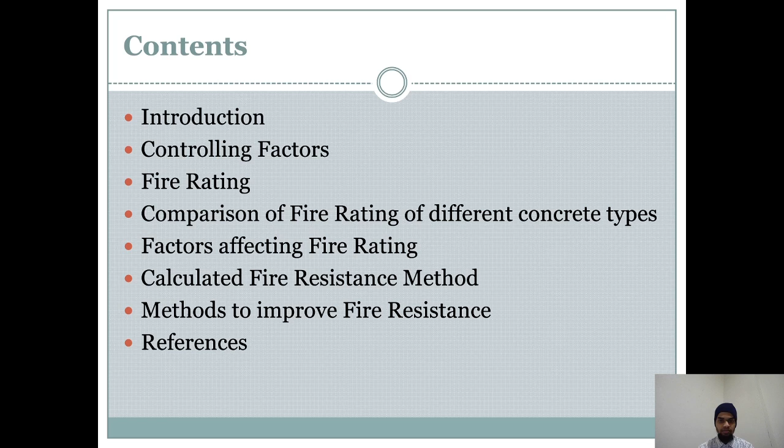In this context, we're going to look over its controlling factors, then what is fire rating, comparison of fire rating in different concrete types, factors affecting fire rating, a few calculated fire resistance methods, the methods that can improve fire resistance, and a few references as well.

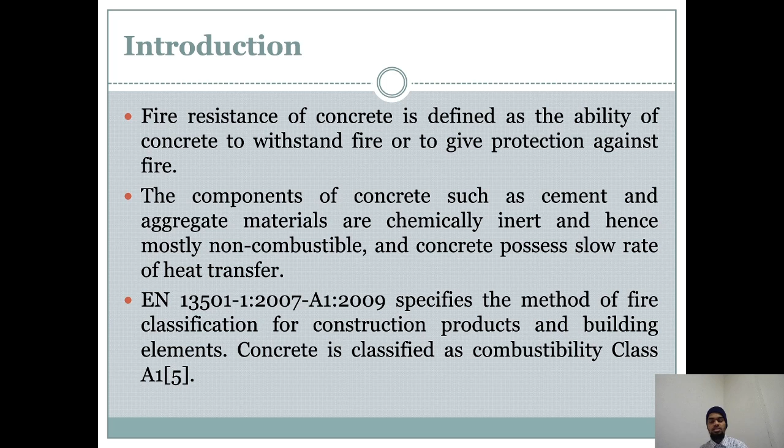So, what is fire resistance? It's the ability of concrete to withstand fire or to give protection against fire. The components of concrete, such as cement, sand, fine aggregate, coarse aggregate, are chemically inert and hence mostly non-combustible, and possess a slow rate of heat transfer. European national standards, mentioned in the slide, have specified the fire classification for construction products and building elements, in which concrete is classified as combustibility class A1.

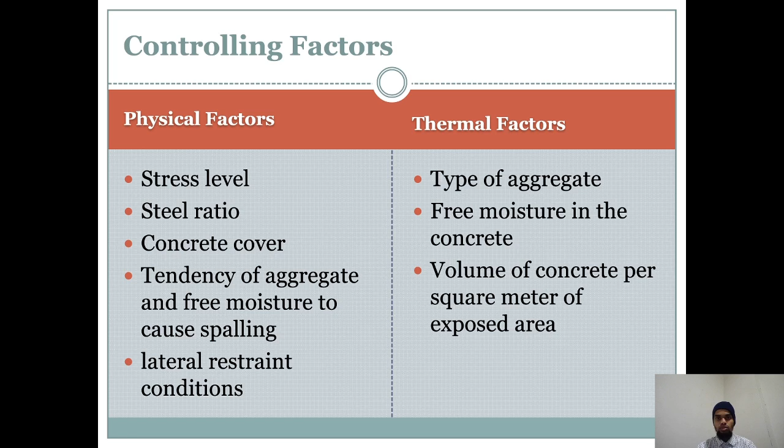There are a few factors that control fire, divided into two categories: the physical factors and the thermal factors. In physical factors, the stress level, steel ratio, concrete cover, the tendency of aggregate and free moisture to cause spalling, and the lateral restraint conditions are to be considered. Whereas in thermal factors, we must look at the type of aggregate, the free moisture in the concrete, and the volume of concrete per square meter of exposed area.

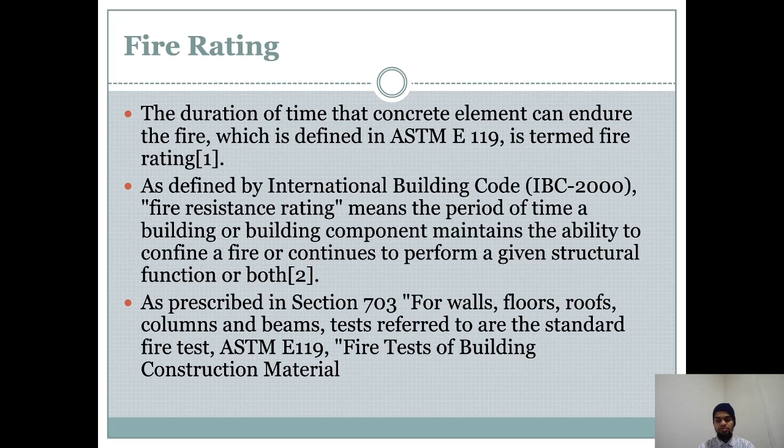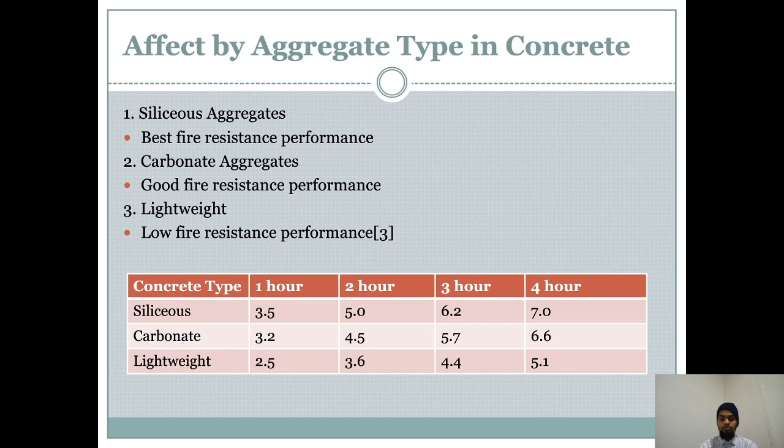When we talk about concrete and fire, we must also look at the different types of aggregates used in concrete, which have different effects. Some can be good, some can be bad. For example, siliceous aggregates are considered the best fire resistance performer, carbonate aggregates just good, and lightweight the very low fire resistance performer. The table describes the different concrete types and the hours of fire resistance. For 1 hour of siliceous material, it is like 3.5 inches. The whole table is shown here.

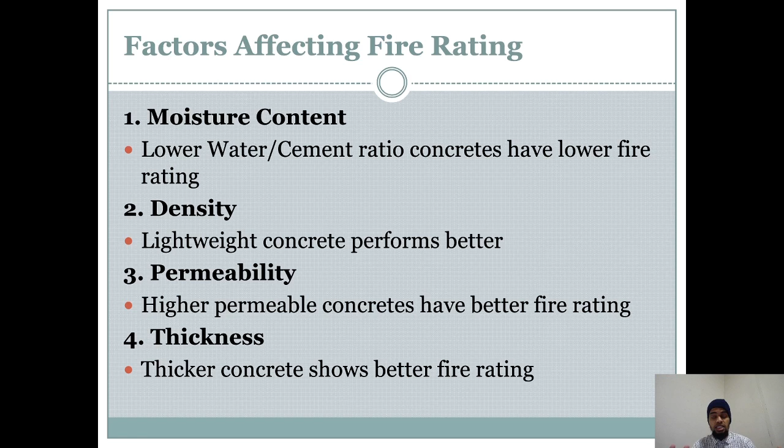Thirdly, there is permeability. Higher permeability concrete possesses better fire rating. And lastly, the thickness. The thickness of concrete also affects fire rating. The thicker the concrete, the better the fire rating.

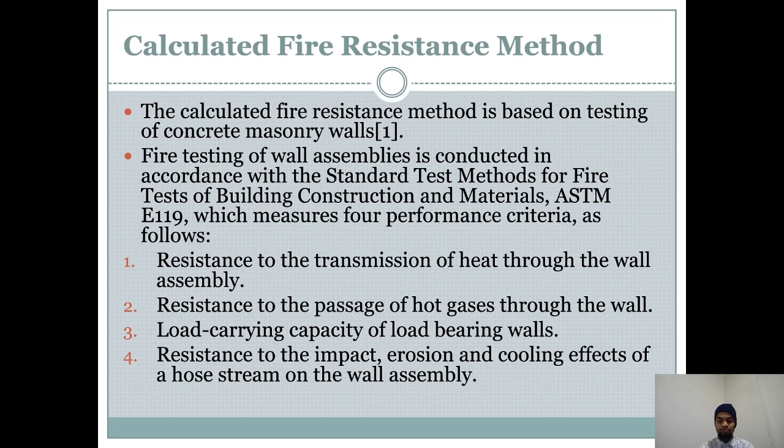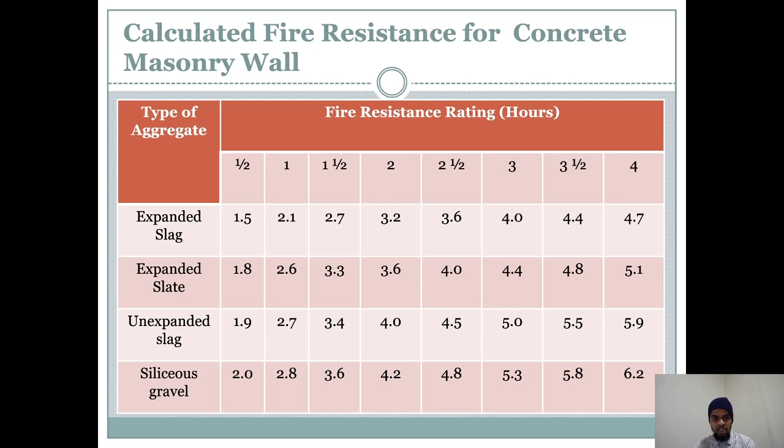The calculated fire resistance per hour depending on the type of aggregate is shown in this table, for aggregates such as expanded slag, slate, unexpanded slag and siliceous gravel. The values from the table can be determined by direct interpolation, but the requirements of the standards mentioned here shall apply. It is also important to understand that the minimum required equivalent thickness corresponding to the hourly fire resistance rating for units with a combination of aggregates shall be determined by linear interpolation based on percent by volume of each aggregate used in the mixture.

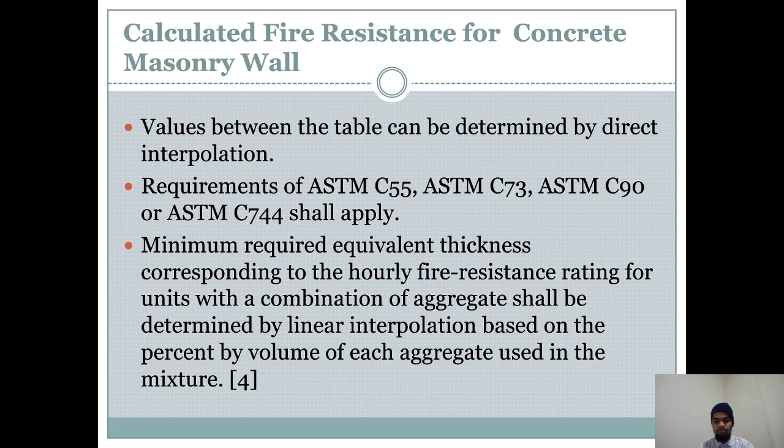Finally, there are a few methods that can improve fire resistance. Firstly, fire resistance of concrete can be improved by the use of aggregates consisting of lime rock, limestone, dolomite. As they are exposed to heat, they calcine and liberate carbon dioxide. Secondly, spalling in concrete due to high temperature can be reduced by the use of polymers or polypropylene monofilament fibers. The usage of heat shields coated with intumescent paint can also improve fire resistance, as well as protective boards, etc.